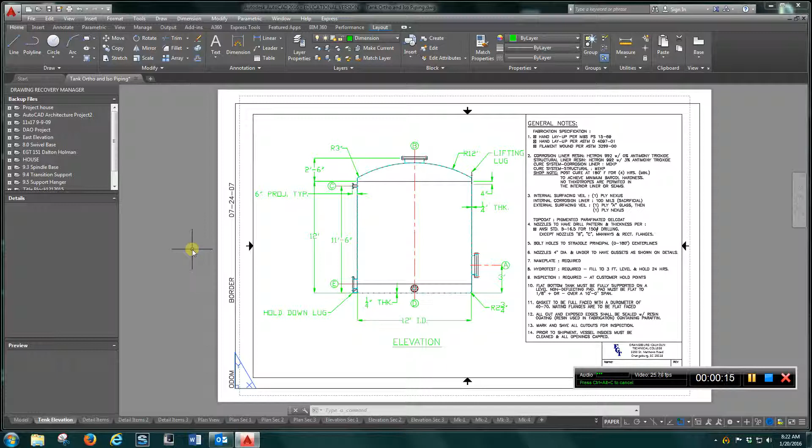What we're looking for here, the first sheet is going to be your tank elevation with all the dimensions and the general notes. The only thing I want you to change on this is probably make the text and the general note box about 2/3 this size, and that'll give you more room to put your tank drawing here.

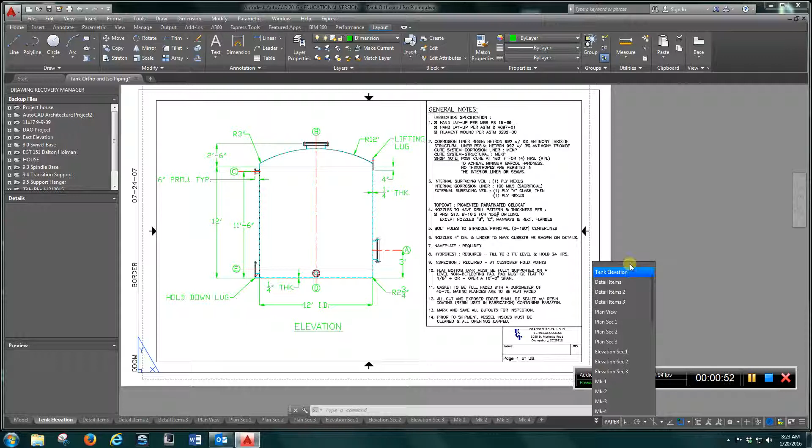So this is what I'm looking for the elevation. Orientation is going to look like this. Make sure you got all your center lines, all your nozzles, and again, with the handout I give you, you're going to add this 12-inch flange here, and later we're going to rotate it down 90 degrees, so you'll see that.

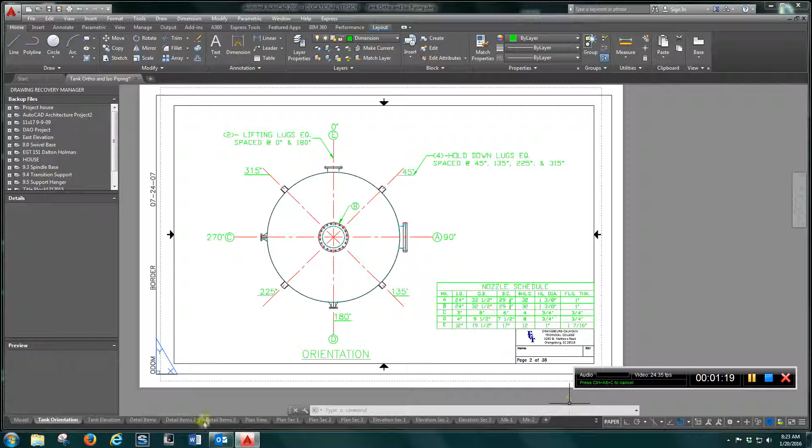You got your nozzle schedule here. Moving on, I'm going to go to the detail sheet of the lifting lugs and the hold down lugs here. So put all of these on one sheet.

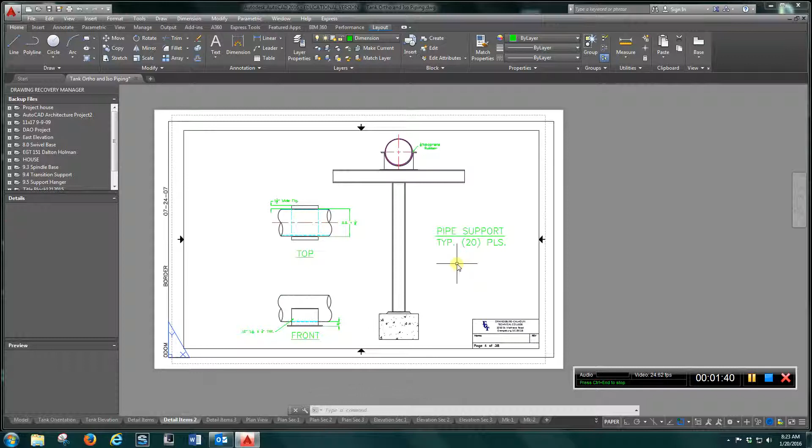Sheet 4. These next sheets you can skip, or you can go ahead and finish them up, but put these in the front here. This is going to be your pipe supports along with the structural steel and the saddles. So this will be sheet number 4.

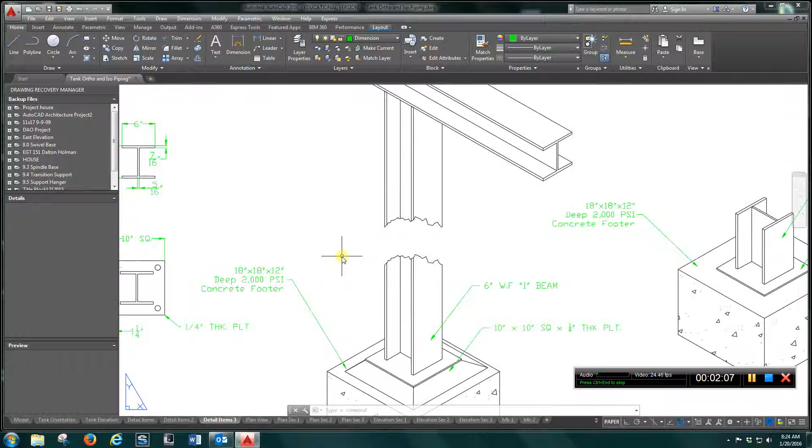And again, here's your concrete footing with your notes. Try to zoom in on here where you can get a look. And again, all of these are on the handout sheet that I gave you.

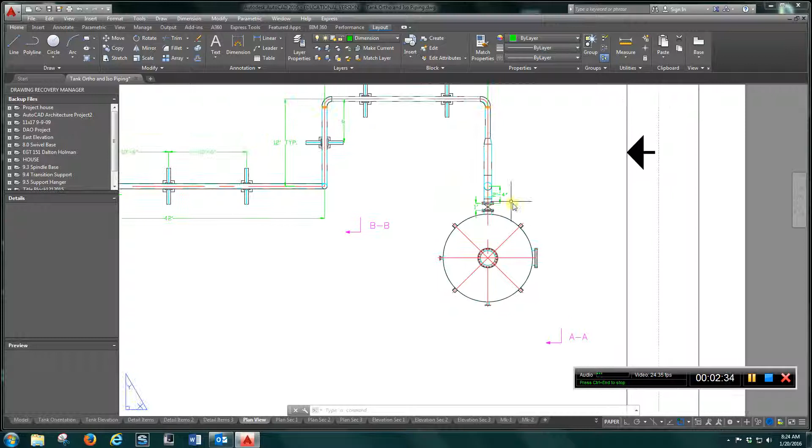Alright, there are 3 different sheets for the isometric drawing that you will convert to orthographic. And here's the vessel that you completed. So drop that tank in, connect all 3 pipe sheets together, and this is going to be your overall plan view of the project.

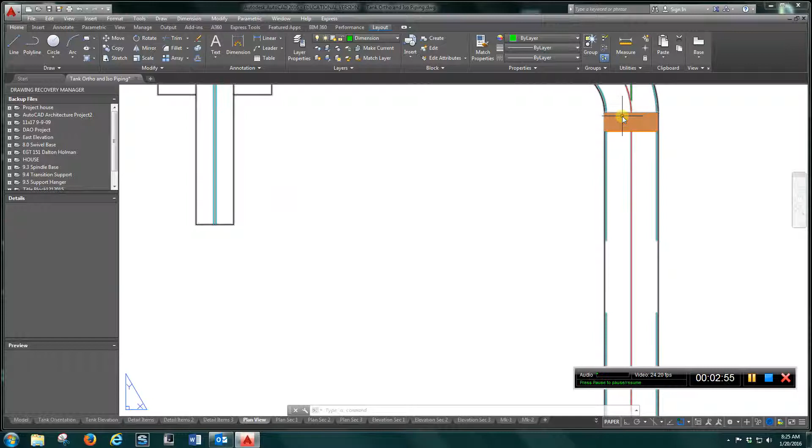And again, we can see the supports. Later we'll get to that, but you're going to come in and put these supports in here, and also your field welds, you'll see those located here, and your views. There's A, B, C, D, E, F, and G elevation views that you're going to use. Okay?

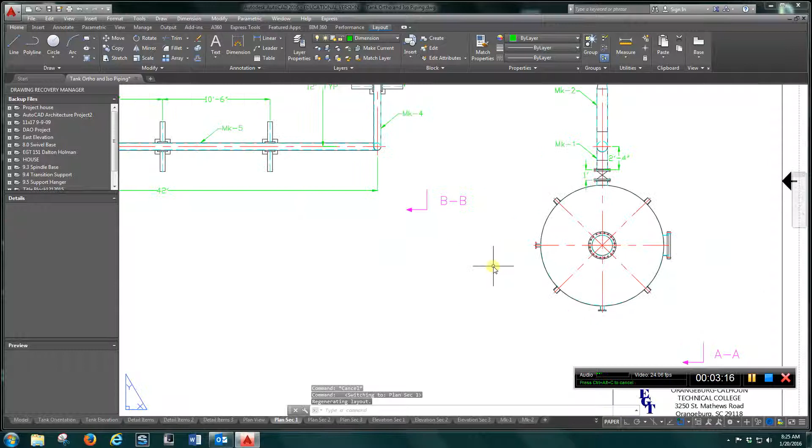The first isometric plan view looks like this, and it's got 3 views, A, B, and C on it. And it's got your supports. So this is what I'm looking for on the first plan view.

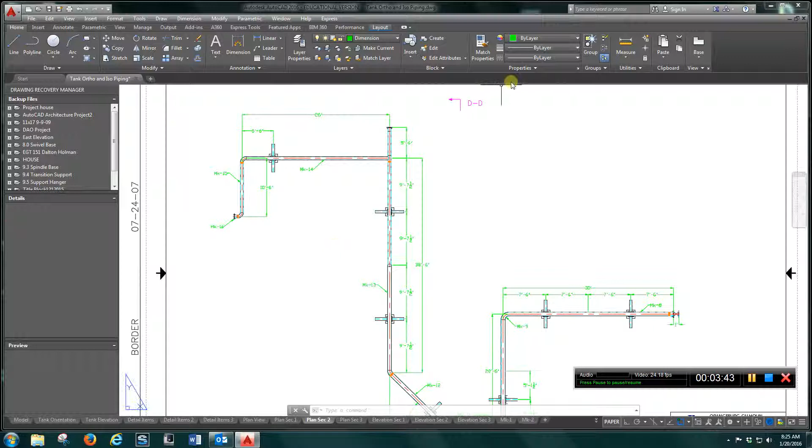Second plan view, it's like this. Take a look at your dimensions, make sure you got all of the notes, and you got all of your section views like that. Okay, and the last one,

Sheet 9, same thing. And again, these 3 plan views are all put together here.

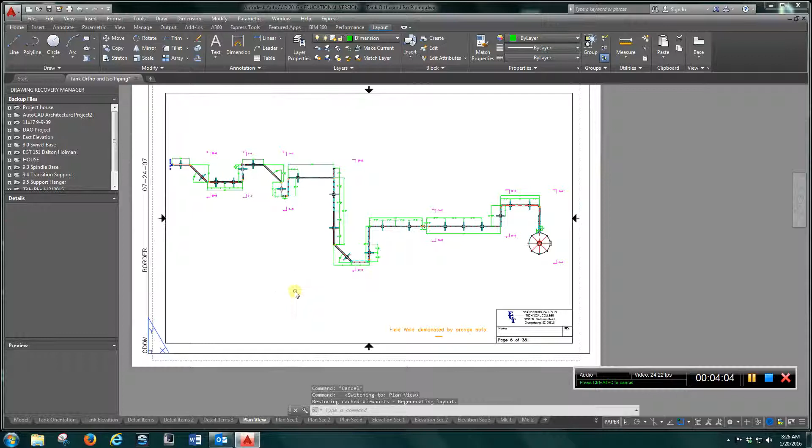Alright? Then you're going to drop back and do your elevations. For sheet 1, you have 3 elevations, A, B, and C. Here's your elevation of your tank. You can just drag that in, drop it in, create you a concrete pad.

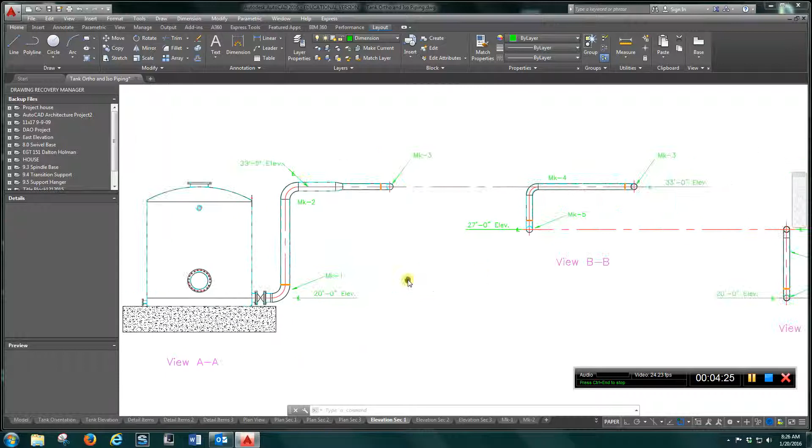Here, draw your elevations in. Remember, we start at 20 feet, go up to 33, down to 27, and again back to 20.

Okay? Sheet 2, you just put 1 elevation in, view DD, just like this.

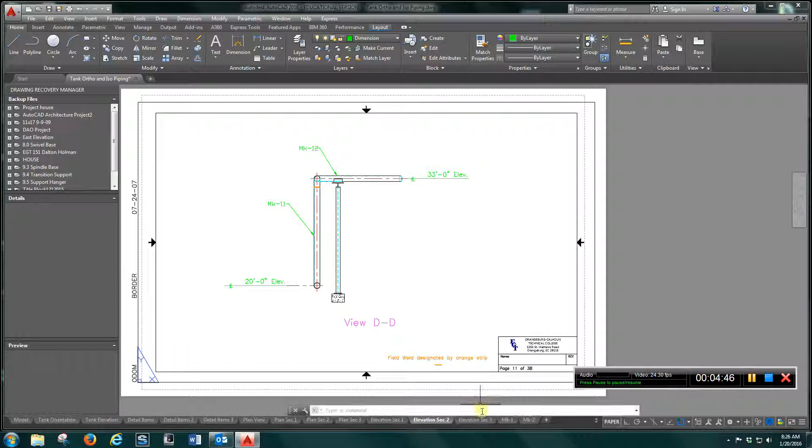Elevation sheet 12, E, F, and G. Okay? Once you have all of that, you're going to start your spool drawings. And pretty much you can go back to your, let's look at the first one.

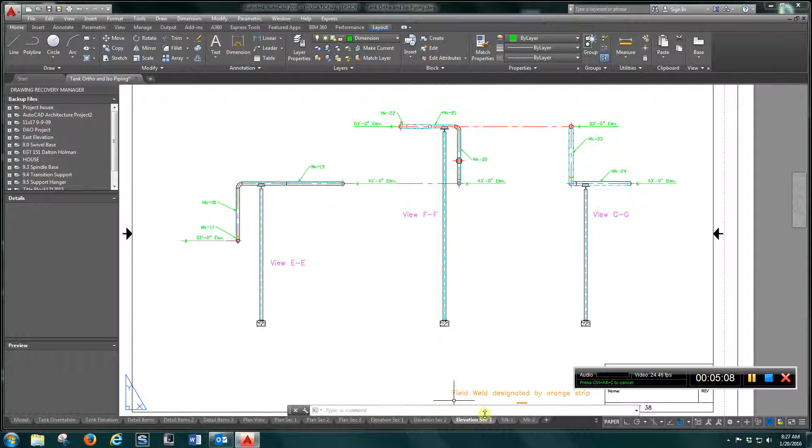Alright. And again, you don't have to redraw this, just go back to your first elevation sheet, copy the piece that you need, bring it in here and drop it in.

Same thing with the next piece, sheet 14. Okay, we have the tank, we have the elbow that comes up. Here's your mark number 2.

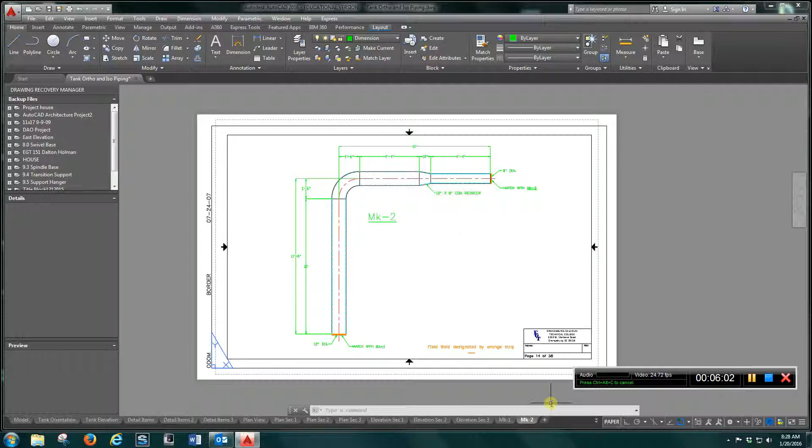Okay, let's go to mark 3. You're just going to continue down the line. Sheet 4, mark 4, sheet 16, looks like this.

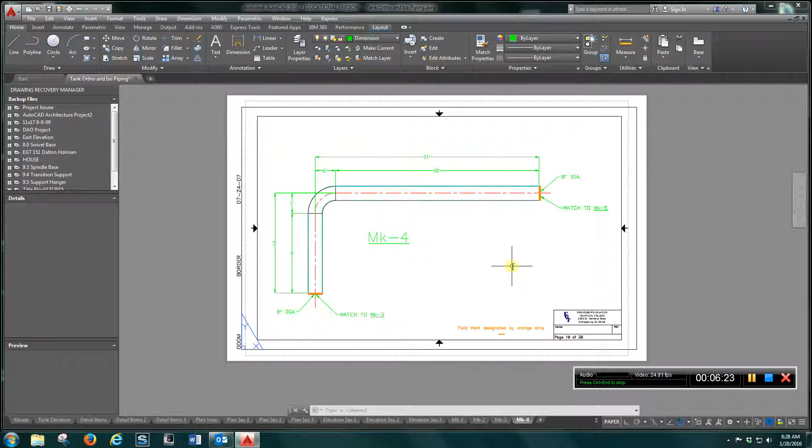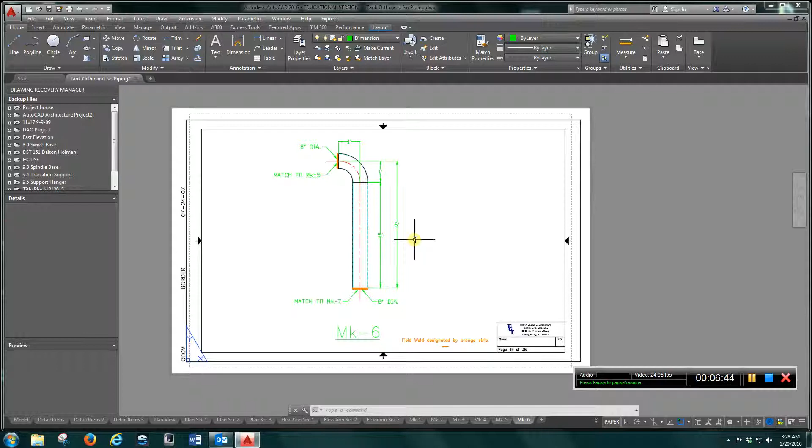Sheet 17, mark 5. Sheet 18, mark 6. Mark 7, sheet 19. Mark 8, sheet 20.

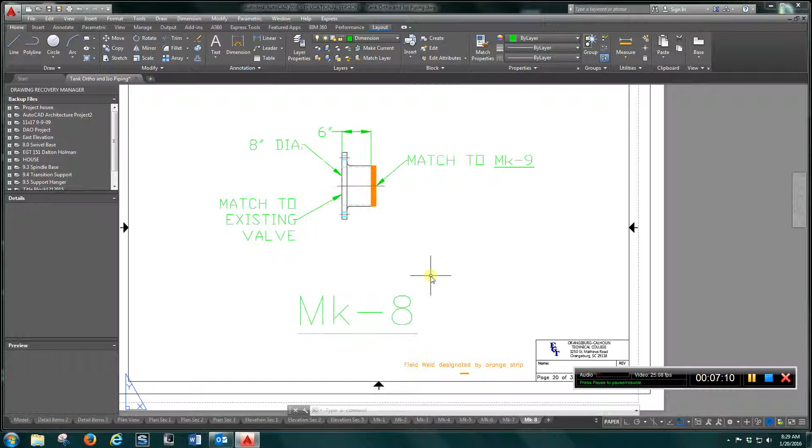Again, everything notes field welds. Sheet 21, mark 9. Sheet 22, mark 10.

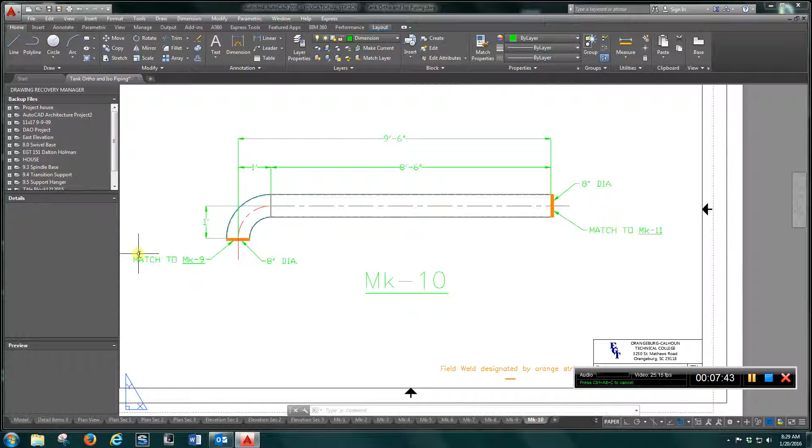Make sure you're putting your match line notes here. Sheet 23, mark 11.

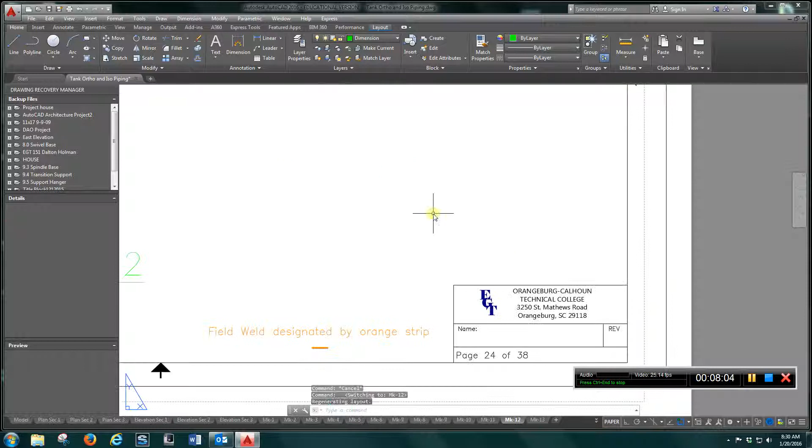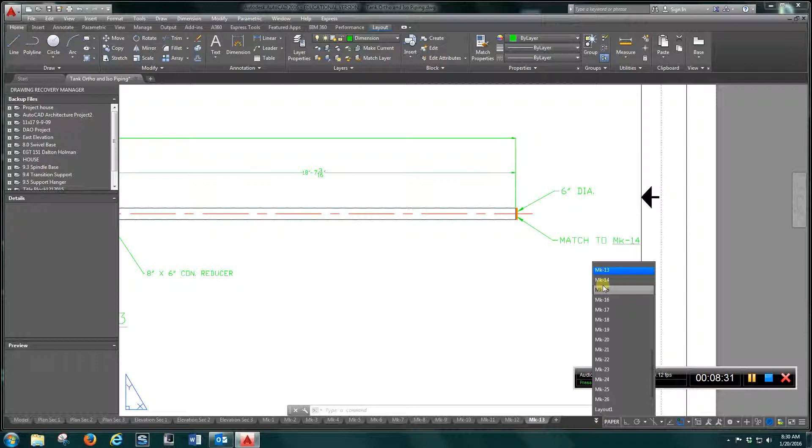Sheet 24. It's 25. Sheet 26.

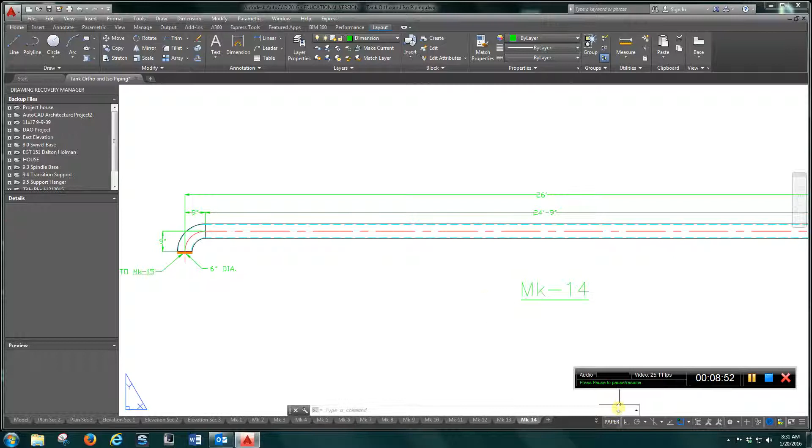You got a special teed in joint here. Sheet 27, mark 15.

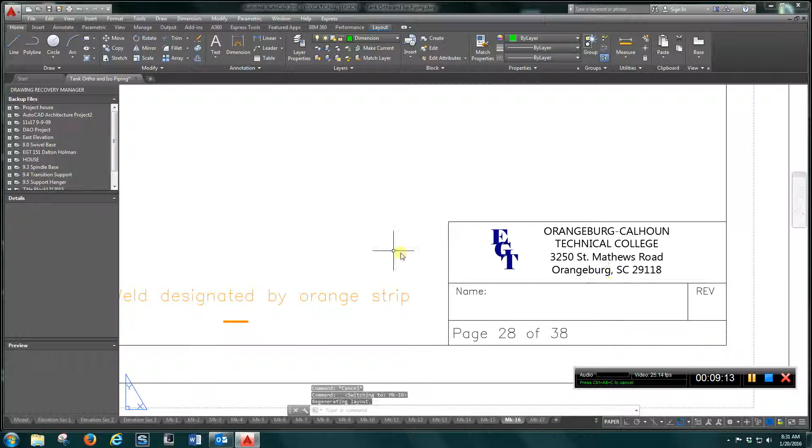So just make everything just like you see it on these sheets. Sheet 28, 16. Sheet 29, mark 17.

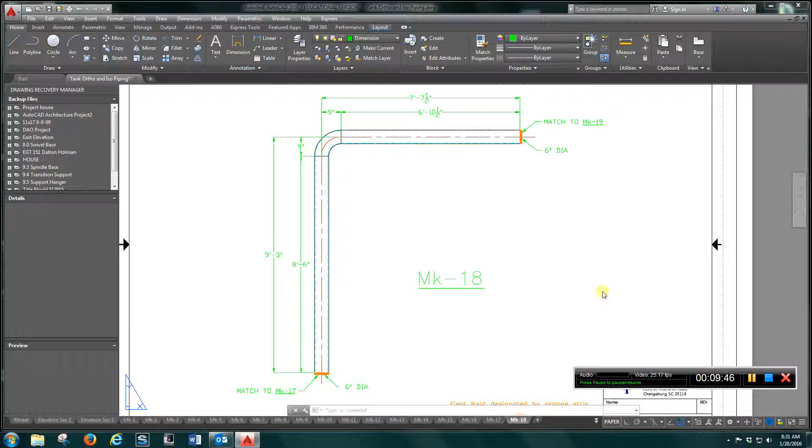Sheet 30, mark 18. Sheet 31, mark 19. Sheet 32, mark 20.

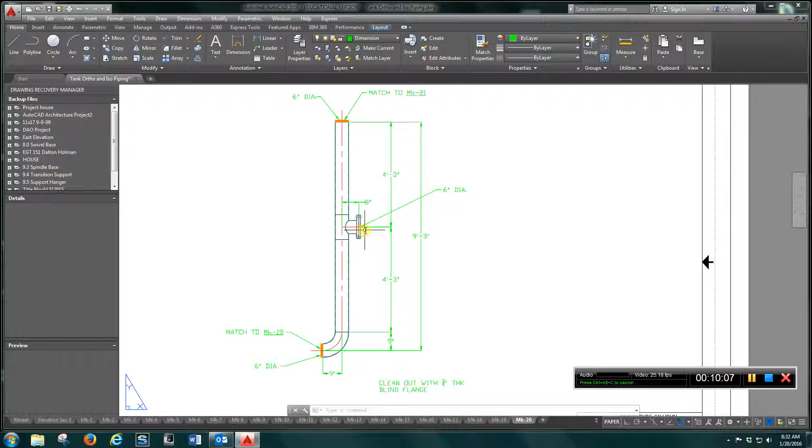Got a teed in joint. Make sure you put that blind flange here. Your clean out note. Okay.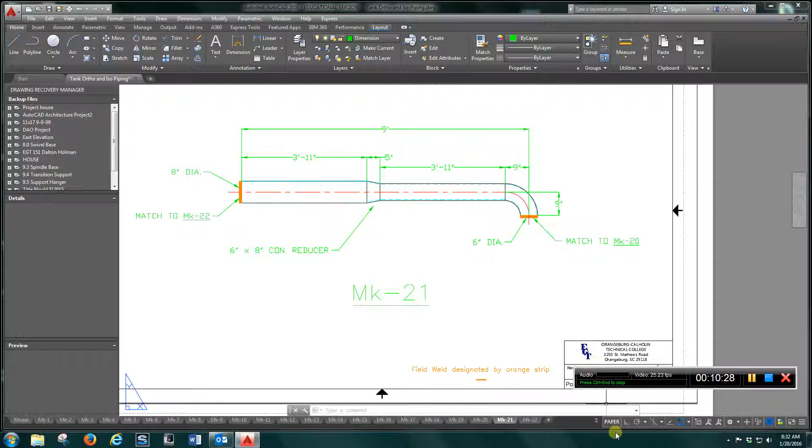Sheet 33, mark 21. Sheet 34, mark 22. Got another clean out with a blind flange.

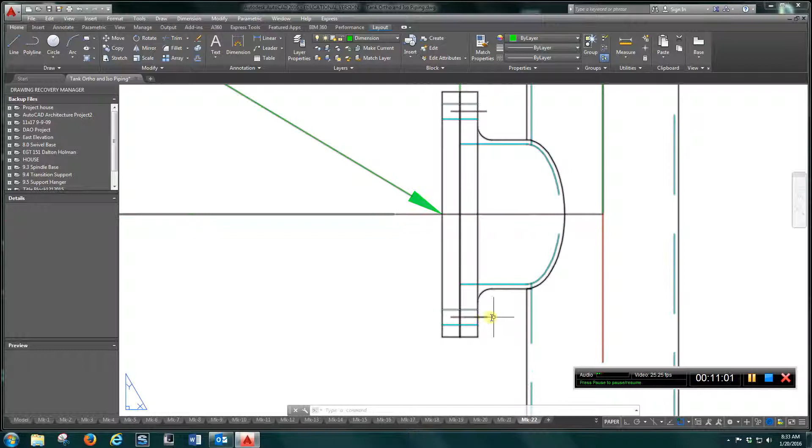I'd make this center line equal. See how the center line ends here? Pretty much these drawings are about 95%, 98% correct. There'll be a few things we have to tweak. That would be one of them. Both of these center lines need to stick out the same on both sides. So little things like that we can take care of, no problem.

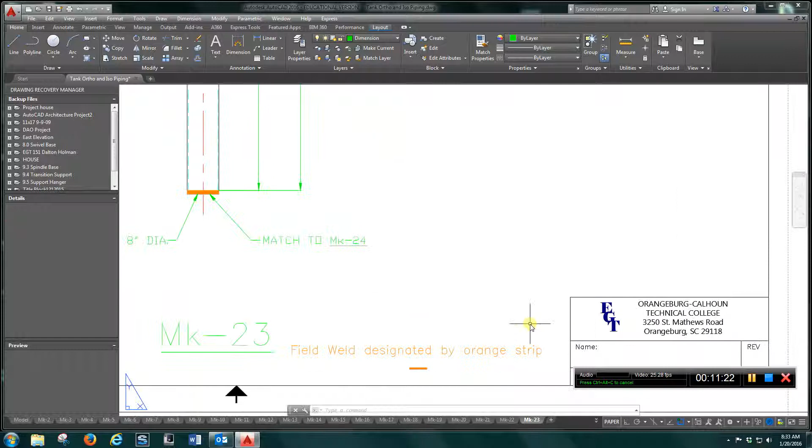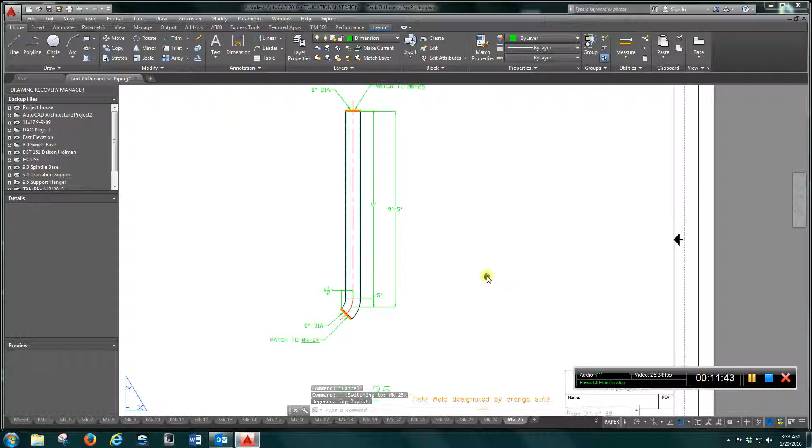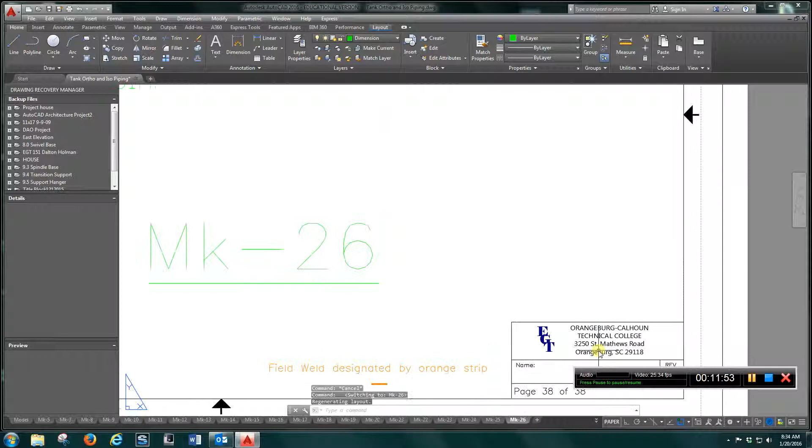Sheet 35, mark 23. Sheet 36, mark 24. Sheet 37, mark 25. And last, mark 26, sheet 38.

Okay, so put all these together in one package, and that will complete the project. Just refer back to this video if you have any problems.